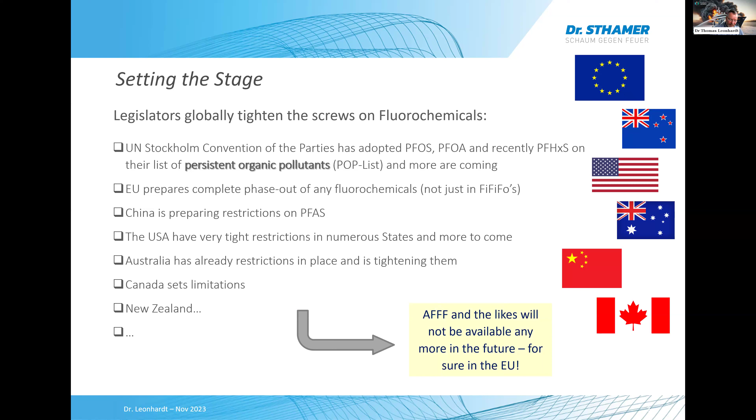Australia already has restrictions in place and is tightening them. Canada, New Zealand, and so on—you see that more and more international legislations are tightening the screws on these chemicals. So it is very likely, if not certain, that AFFF and the like—foams with fluorochemicals in them—will not be available anymore in the future. For sure, they won't be available in the EU.

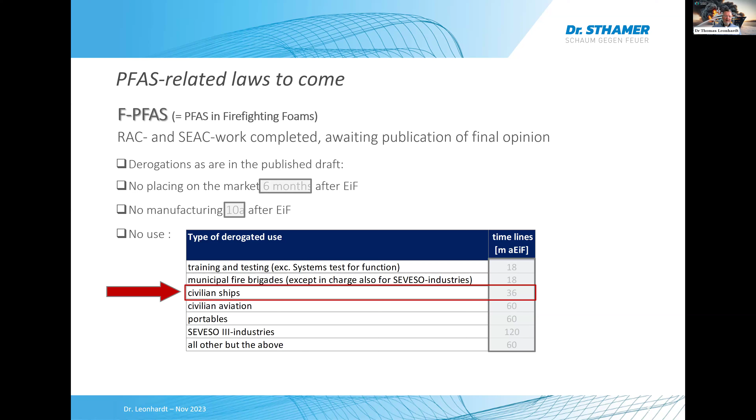Well, what does IMO do about it? In 2022, both SSE and MSC adopted a decision to recommend the banning of PFOS, which is basically following the adoption of PFOS onto the list of persistent organic pollutants of the Treaty of Stockholm. So far, it is just a recommendation to ban PFOS.

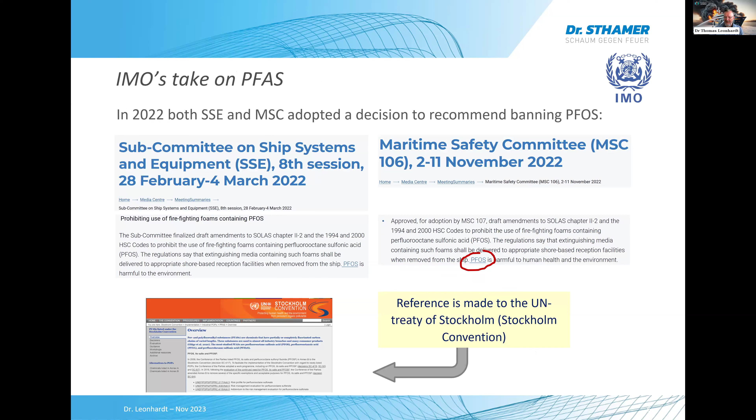However, in recent IMO publications, you find a text passage which says or recommends to prepare for 2026 a foam firefighting ban, which is obviously not quite correct because it's not a ban of firefighting foams. It is only a ban of certain chemicals in firefighting foams. So be cautious about publications and statements like that.

The tanker operator says in SOLAS Chapter II-2 and HSC codes will be amended by a ban of any firefighting foam agent containing PFOS. And again, just as a reminder to my introduction, PFOS has already been banned from the firefighting foam technology starting in 2008. And in 2010, the legal limit was again lowered. So I think PFOS is not an issue today anymore.

If you buy foams in a big chemical legislation such as the US and Europe, etc., you won't find any PFOS containing foams. However, this ban applies to fixed and mobile systems. Existing systems need to remove PFOS and dispose of it ashore. Any of the above must be completed no later than January 1st, 2026, with reference made to the UN Stockholm Convention.

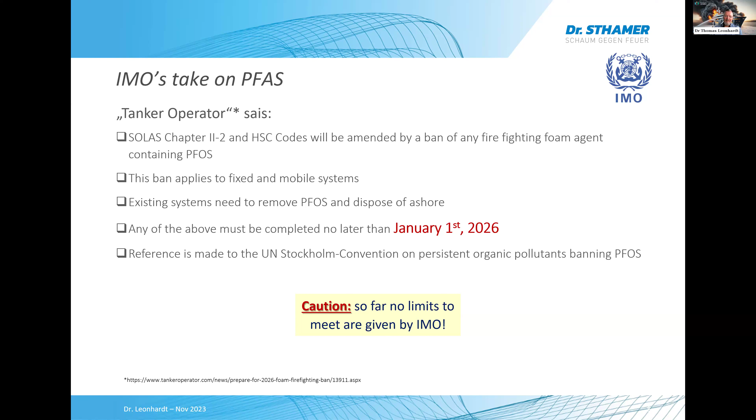Well, how big is the risk actually? As I said, PFOS is already restricted in many legislations since several years, and PFOA is mostly phased out as well since 2020. Consequently, the fluorosurfactant manufacturing industry has almost globally moved away from the so-called C8 technologies. Foam agents sourced in regions with restrictions on C8, and younger than 2020, are not affected by this. High expansion or inside air foam concentrates are also likely not affected because they are fluorine-free foams per se.

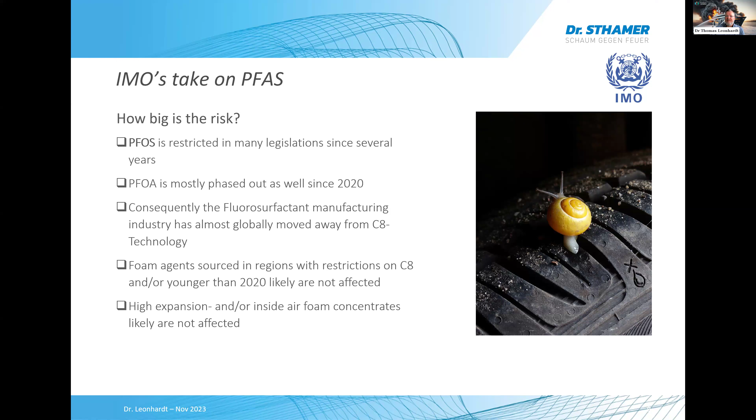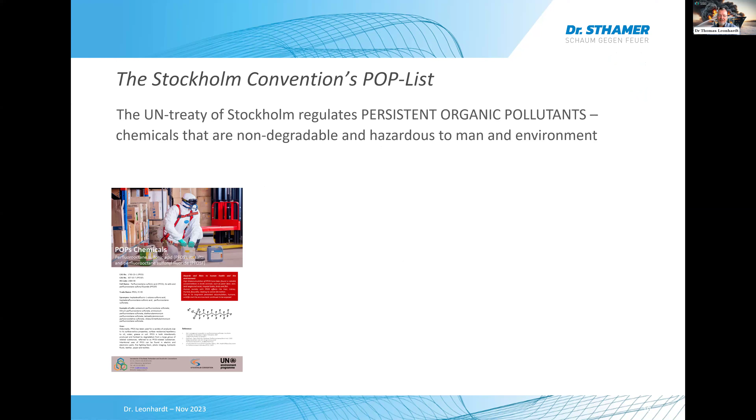We've been talking about the Stockholm Convention, the POP list, a couple of times in the meantime. It's a UN treaty that regulates persistent organic pollutants, chemicals that do not disappear easily in the environment. Once you bring them into the environment, they are just there. For some of them, the degradation time or half-life in the environment is hundreds of thousands of years even.

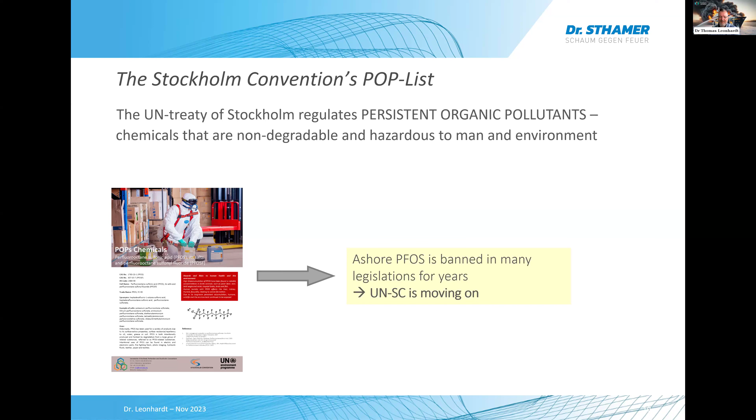PFOS is banned already in many legislations for years, and the UN Stockholm Convention is moving on. One of the first was PFOS, as you see in this publication, and then there's another couple of perfluorochemicals that they have in the pipeline for adoption onto the POP list, which would lead to similar restrictions compared to PFOS. The next one is PFOA, that has already been adopted. PFHxS, which is perfluorohexane sulfonate, has already been adopted. These two chemicals are not present in firefighting foams as a chemical, but only as trace amounts.

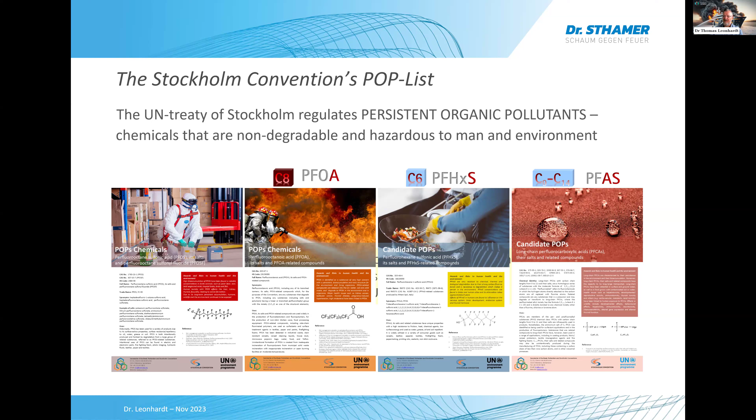And then we have the C9 to C11 PFAS. Also, those are only available in trace amounts. So coming back to IMO's take on PFAS, on the totality of PFAS, the IMO is also looking at extending the ban to other fluorinated substances, not just PFOS. That is already pointing towards the future and what's going to come next. A new section, fire extinguishing media restrictions, will be added to the SOLAS and HSC codes to allow for easier adoption of future prohibitions or limitations.

And what does that imply? First and foremost, the supply of fluorinated foam agents may dry up as the applications for fluorochemicals will fade. Replacing PFOS-contaminated foam agents by other AFFF may turn out to be a regrettable investment. You may see that if you replace C8-based foam now by C6-based foam, the new foam is not going to see its natural lifespan.

It will have to be phased out again in between. System adjustments should consider using fluorine-free foams if you do the change today. So anytime you put the vessels in the dry dock and rework and clean up all the installations, the firefighting installations, to prepare them for new foam, it is well recommended to consider doing that for the use of fluorine-free foams, because that is what is going to come for sure.

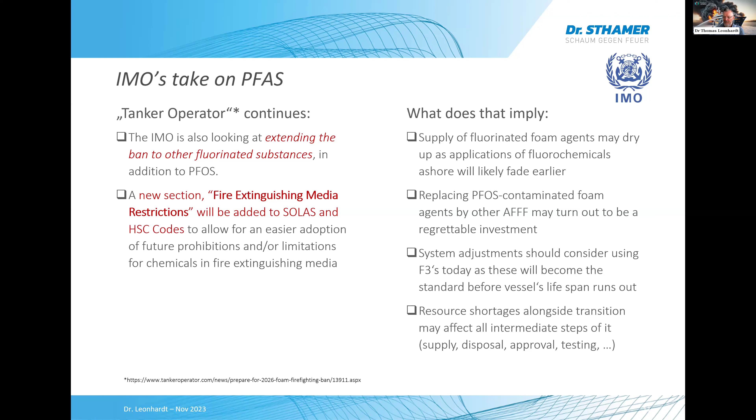This is an extract of the most recent proposal of the ban for PFAS in firefighting foams, and it clearly says 3 years after entry into force for civilian ships, including tankers, ferries, tugboats, and other commercial vessels. It's not talking about privately-owned vessels. However, what we have not seen yet is a clear instruction or understanding of how the European harbors will treat boats that have fluorinated foams on board in the future.

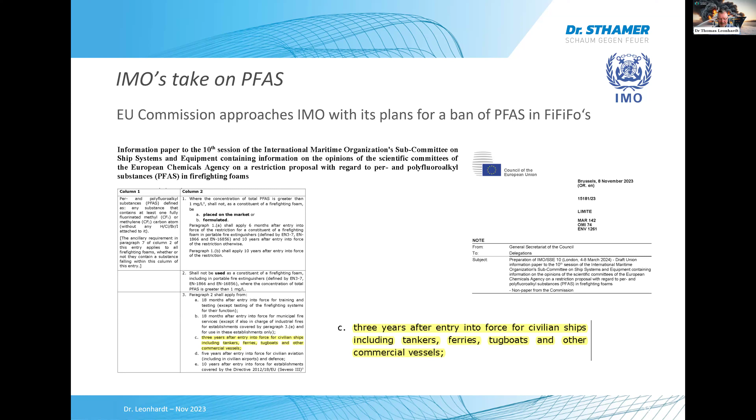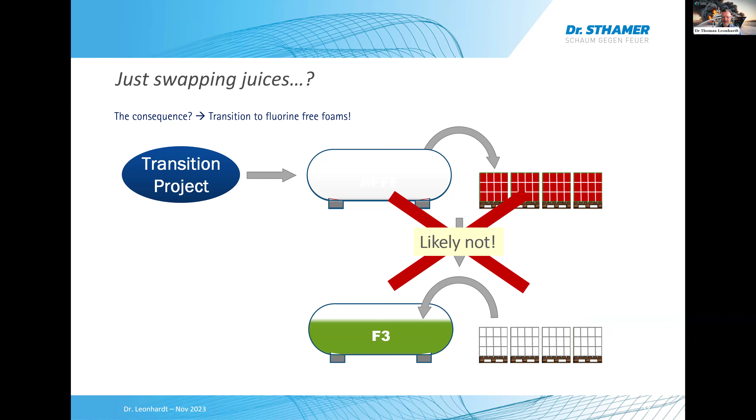Well, when we talk about a transition project, some of you might have been going through this C8 to C6 exchange, and found it to be very easy. You take out the old juice and just wash the containers. You had the old juice in the storage containers and you backfill them with new juice. When we talk about fluorine-free foams, this is very likely not the case, simply because fluorine-free firefighting foam agents are very much different compared to AFFF.

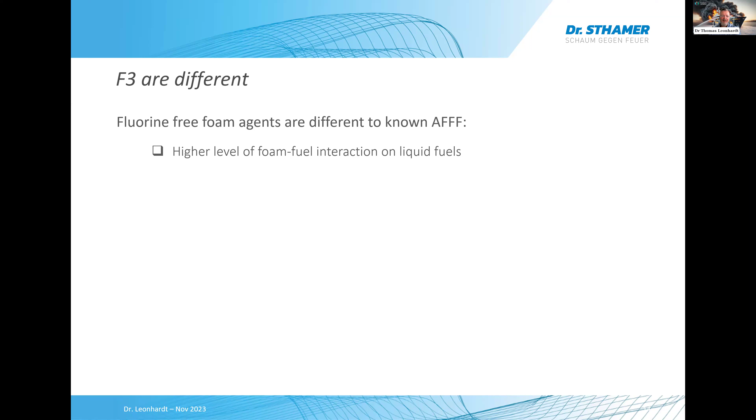They have a higher level of interaction with liquid fuels. We're not concerned about Class A fuels or Class A fires. Any fires of plastics, tires, or other Class A solid materials is not so much a concern. These are fires that fluorine-free foams can evenly well handle, or even better handle, compared to AFFF. But liquid fires is the big thing. We have a much higher level of dependency on a functional foam quality, because we're no longer having the chemical support of the fluorochemicals, but we need a good quality foam blanket to be actually able to physically extinguish the fire.

The effectiveness of a firefighting system is much more dependent on effective foam application compared to AFFF. AFFF is very forgiving, and even foam application that was almost not impacting fire performance, or just slightly impacting it. Now this changes, and the way of application of the foam blanket has a major impact on the effectiveness of the approach.

They are also responsive to water qualities, not just fresh and seawater, but also water qualities in between, things like industrial water, which can contain, to some extent, corrosion inhibitors or biocides, etc. These chemicals do have an impact on the foam quality, and by impacting the foam quality, they of course also impact the fire performance of the foam.

Stability of concentrates is an issue. Viscosity very clearly is an issue. All of the high-performing fluorine-free foams you find on the market today are high-viscosity products. And there's probably even more.

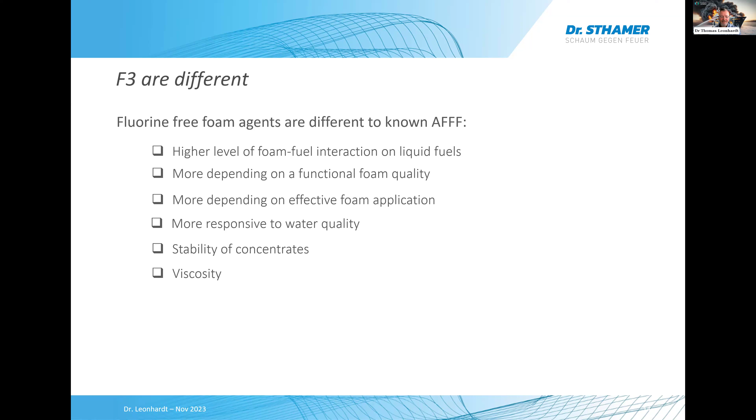So coming back to the transition project, yes, you have to take out the AFFF, but then we get into the details of the minutiae. We have a lot of cleaning efforts to meet the legal requirements. You have to consider selecting a new foam, which needs to be adjusted to what you have in means of hardware, what you have in means of fire risk, fuels, etc. Maybe you have to do some changes to the system. You have to do a relisting of the system, so reapprove the system or get a new operating permit, etc. All of that together consumes quite a lot of time, in particular since many others are doing the same. So time is very much an issue when you're transitioning away from AFFF to fluorine-free foams.

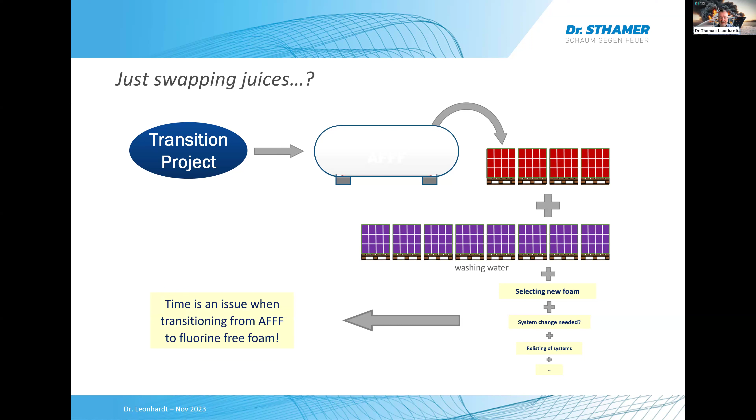We're often asked, is it important to start now? We haven't seen the law yet. We don't know when it's going to enter into force, etc.

But consider the following: transition does require a thorough review of the fire protection concept, and depending on the complexity and the size of the concept, that may have a big impact. It is, of course, a lot of difference if we're talking about a 50-meter yacht or a 300-meter container vessel or a chemical tanker or whatever. So there's quite some differences. However, the more complex this whole thing gets, the more difficult the whole thing becomes also.

Defining and developing the necessary changes to the concept to keep it working, to keep it in shape, means to plan, to test, probably to apply for approvals, to do function tests, etc. So all of that has to be operated in the background and prepared for ahead of time.

Then we're talking about selecting a new foam. As I said earlier, the new fluorine-free foams are more selective, or more affected by the interaction with the fuel. That means you need to very clearly understand your fuels, and you need to select the foam that fits best to all of your fuels. You might even have to consider restricting fuels on certain boats, depending on the firefighting system they have on board.

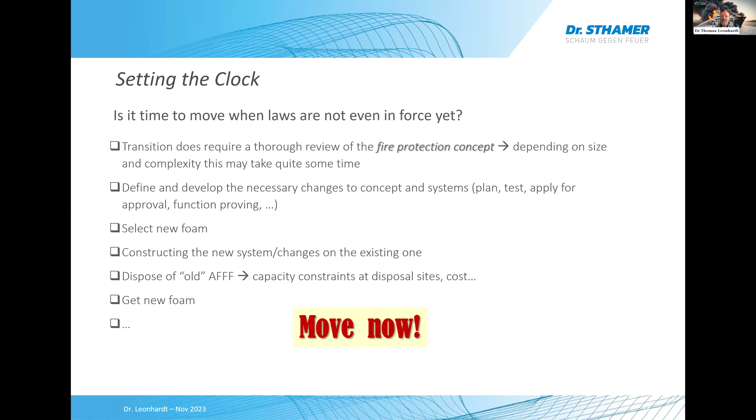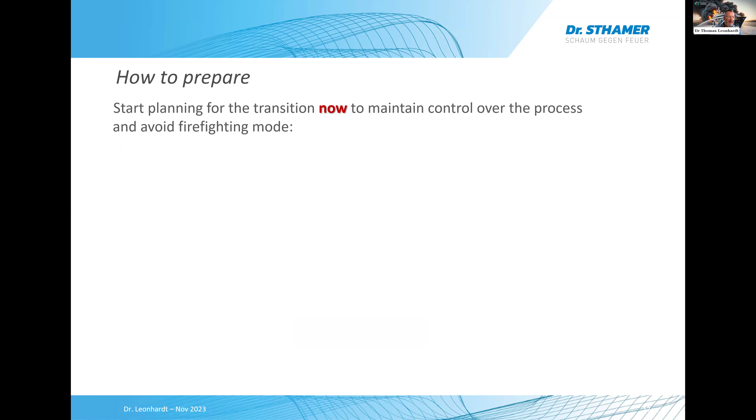Well, how to prepare? It is, of course, recommended to start at least with the planning for the transition right away, and this way maintain control over the process.

The restrictions on fluorochemicals will come. There's no question about it. The only thing that is in question is the extent of restriction, the extent of derogation, and the exact point in time when they enter into force, but they will come.

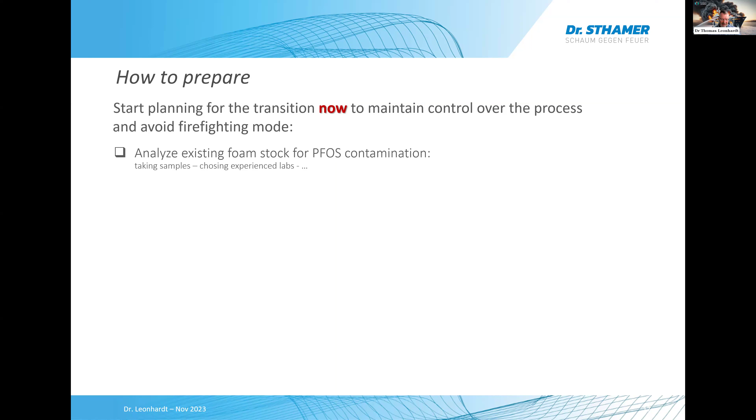So it would be well recommended to start with analyzing your foam stock for the level of PFOS contamination. Maybe if you do not have PFOS-contaminated foam at this point in time, you may not be forced to immediately act to meet the 2026 deadline, but you will certainly have a little bit more time to plan the transition away from fluorine-containing foams.

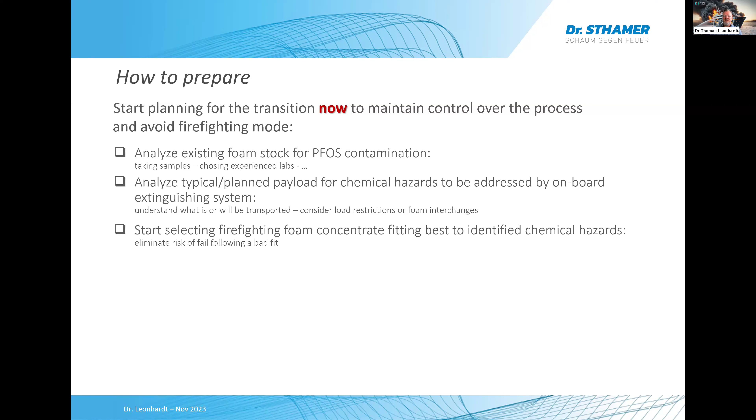It is important to analyze the typical or planned payload for chemical hazards to be addressed on board, because you need to select a fluorine-free firefighting foam that fits best to this type of fuels. Then, of course, you have to select the foam concentrate, and this may include pre-testing depending on what chemicals are transported on board. You may have to run additional tests because as manufacturer we do a lot of testing of our firefighting foams, but there's no way we can test them on the over 60,000 commercial chemicals known in the marketplace.

There might be a need to change, alter, or modify the onboard fire extinguishing system. That typically affects the proportioning system, the piping to the supply stations, etc. And that needs to be looked at, and in the worst case, may require some dry dock time to get this fixed.

Those dry dock stays, of course, need also to be planned to be able to execute the upgrades. And finally, you may need to talk to insurance companies, flags, and authorities to get your boat relisted and reapproved for operation. And then, one little piece often forgotten is training of the crew on using this new type of foam. It's not that you're replacing A by B and everything else stays the same. Using F3 does require some deeper understanding of how foam works to enable the crew to effectively operate the firefighting system and technology installed. So don't underestimate the need for training of crews.

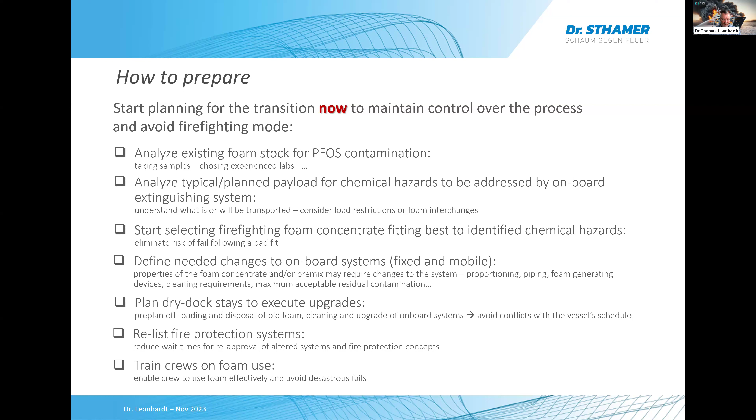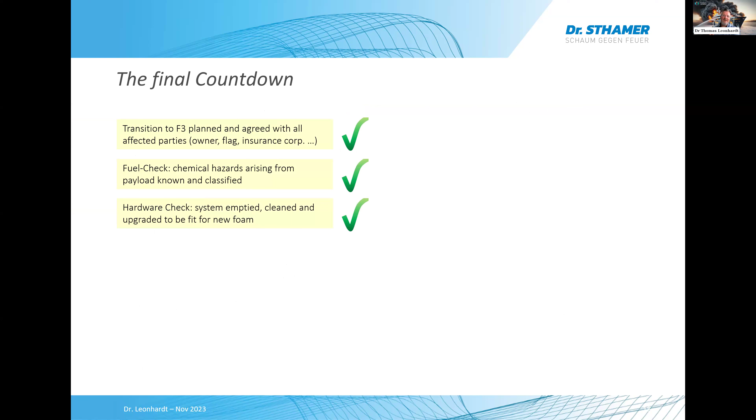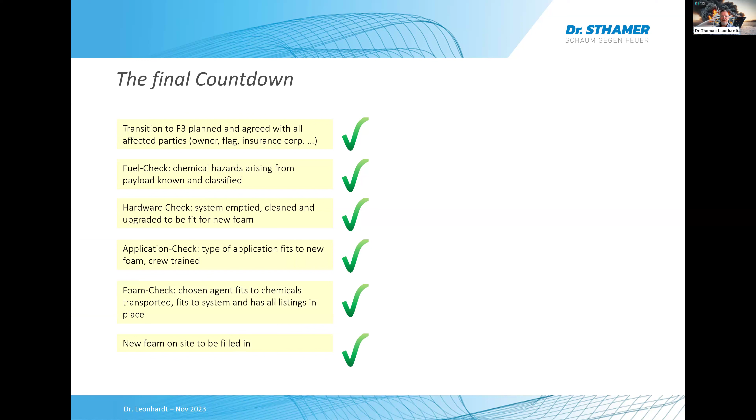As far as the final countdown is concerned, once you've planned all your transition needs and agreed with all affected parties - the owner, the flag, insurance companies, etc. - then you have done your fuel check. You know exactly what chemicals you are dealing with. You have done a hardware check, so you know the hardware on board is capable of producing functioning, effective foam from the agent you selected. You have done an application check - how do I best apply the foam, what applicators do I use, etc. And you have trained your crew to effectively use it. You have selected a foam agent that fits best to your needs, and you have the new foam on site to be filled in. With all of that, you are ready to take off.

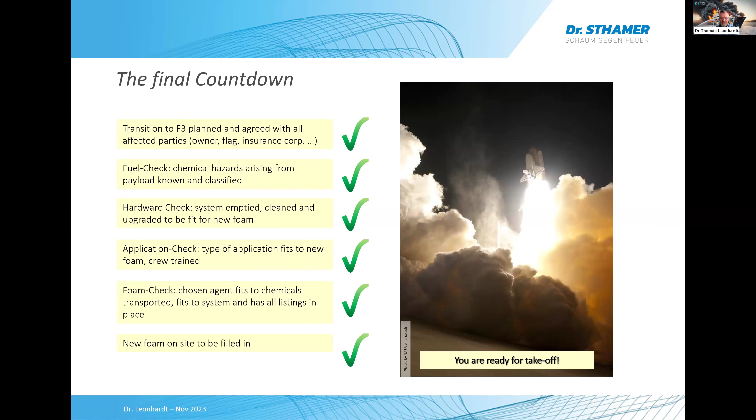And with that, you made it.

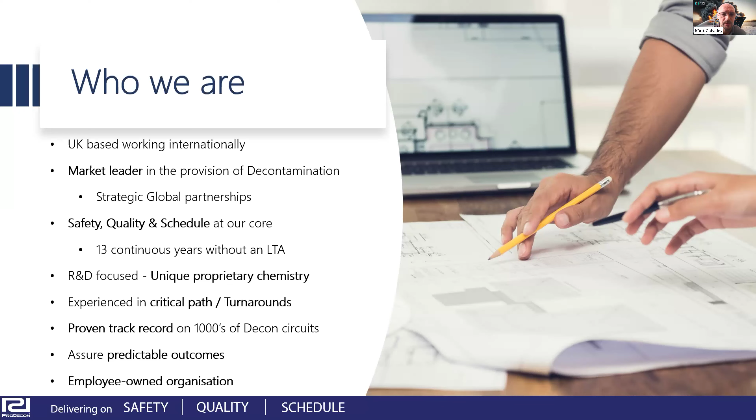So we operate globally. We're based in the UK and Europe, but we have a number of partners that allow us to operate much further afield, over in South America, the Middle East, and more recently Southeast Asia, where we've recently signed a partnership. Our equipment is designed to travel, and we take the solution to the customer.

All of our equipment is contained in 20 or 40 foot containers. So when we're moving overseas, that equipment is shipped to the customer, and the solution is delivered where the customer is based.

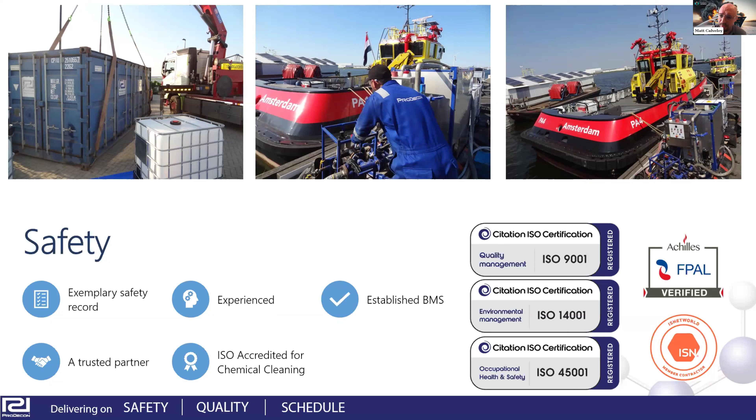Obviously, with the industry we work in, safety is really important, as is quality and environment. We've got an exemplary safety record. We're very much left to our own devices on our customers' sites now - we don't need to be managed, they trust us to operate on their sites. We've got all of the established business management systems and procedures developed for PFAS decontamination, and we're also ISO accredited for chemical cleaning, which is quite unique, especially in the PFAS decontamination industry - accredited by 9001, 14001, and 45001.

So if we move on more to the subject of PFAS decontamination. I mentioned our partners, Tetra Tech - just shy of 3 years ago, we entered an exclusive arrangement with them. Tetra Tech developed the chemistry, the PFAS scrub chemical agent that we utilize to remove PFAS from the tank or system walls. That chemistry was developed at the US Department of Defense. Tetra Tech wanted to look for a partner who had experience in decontamination.

No system is the same, so they were looking for someone who was an expert in decontamination, who could partner with experts in PFAS. Together we developed the relationship. The way the partnership works is Tetra Tech supply the chemistry, and ProDecon manage the customer and all of the in-field decontamination.

Once we've done the analytics to verify the success of the decontamination, those samples and swabs are sent to Tetra Tech, who then issue them to an accredited lab where the PFAS, PFOA or even PFOS is analysed to understand the success of the decon. Once we get the data from the laboratories, which I will talk about in more detail shortly, Tetra Tech then develop an independent report, which is passed on to the customer to inform them of the success of decontamination.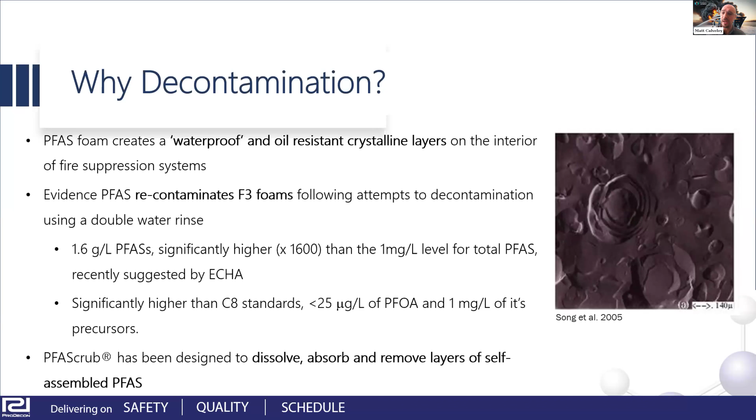Suggested by ECHA. What came to happen of that is that's where they really started to understand, well, hey, this was a fluorine-free foam, where's the PFAS come from? And that's where they started to understand how PFAS started to layer on these systems, and that there needed to be an effective means to remove that PFAS to prevent it from rebounding into your normal foams. This is where the PFAS scrub chemical comes into play. It's designed to dissolve and absorb and remove layers of self-assembled PFAS.

So when we're talking about decontamination, experience does really count. We've got a huge amount of experience, not just in the PFAS world, but in dealing with process equipment across some of our customers' sites, predominantly in the oil and gas and petrochemical industry.

Now, every fire system is unique, and we've done systems from 100 litres up to fire engines, up to 42,000 litre tanks. We are looking at even bigger than that at the moment, but without doubt, there are always in-field challenges. Something's been missed, each system is different, and you need to overcome that. And that's really where the experience comes in.

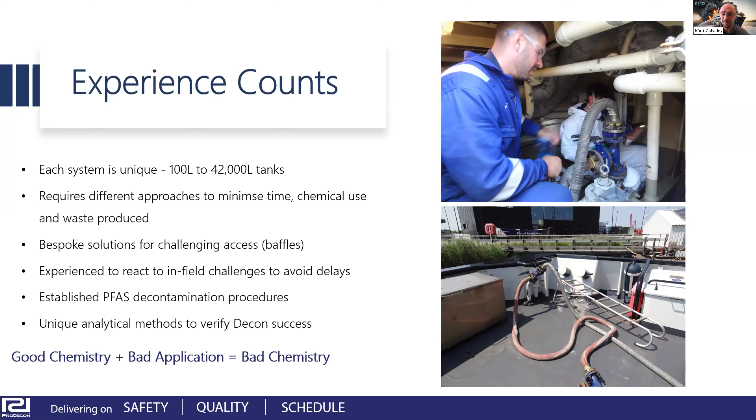So I'll talk on the next couple of slides. I'll talk about the decontamination process and how that works. But what's important is to understand how we verify the success of decontamination. And we have a number of methods to be able to do that.

One of the more unique methods for us is the tank surface testing. A lot of companies test the rinse water at the end of decontamination and check PFAS levels there, but that doesn't really tell you the success of the decontamination. What you really want to understand is the PFAS levels left on the tank wall, because that's where the main risk resides - that's where PFAS will rebound into your new fluorine-free foam and potentially make it breach future legislation.

Not only that, there'll be regret spend, because you'll have to replace that foam and then do an effective decontamination again. Effectively, what our surface testing does is swab the tank wall pre-decon and post-decon, across a significant 100 centimetre squared area, on opposite sides of the tank. That allows us to determine the levels of PFAS on the tank wall pre and post, giving us the data to determine the success of the decontamination.

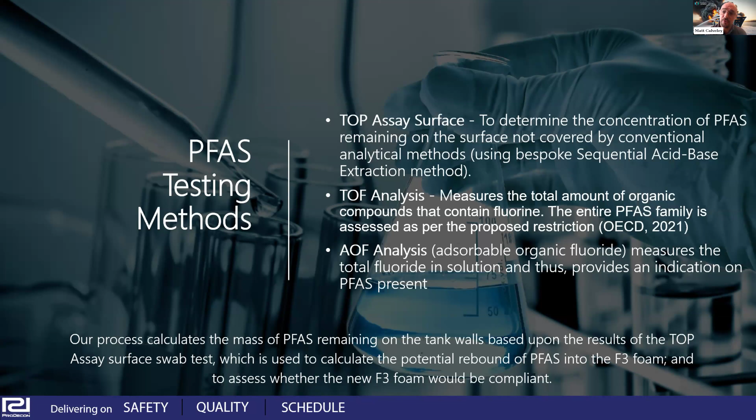But at the moment, we're typically doing TOP surface analysis, and AOF analysis. And out of all the systems we've done to date - over 150 systems - we've had 100% compliance in terms of success.

So we'll talk a little bit about the decon process and how that is completed. We can offer a turnkey solution from foam out to foam in. We very much work with what the customer would like, and with partners like Dr. Sthamer, who may manage the foam out and foam in. It's all about what's best for the project and the project schedule.

Typically, once we've got hold of an asset, we've done all the pre-engineering work, and the method statements and RAMs have been signed off by the customer, we drain and pump out the old foam. We remove and store that - it's all contained in a closed system, in a bonded area, so there's no risk of any leach of foam containing PFAS. That's stored away in IBCs and set aside for disposal with the decontamination waste.

We then move to a water rinse. What the water rinse does is we add the anti-foam, and as we circulate the water with anti-foam - either by liquid fill or spray head methodology, spray being preferred - we remove any foam residue from the systems, from the tanks and the pipe works, typically up to the proportioning system.

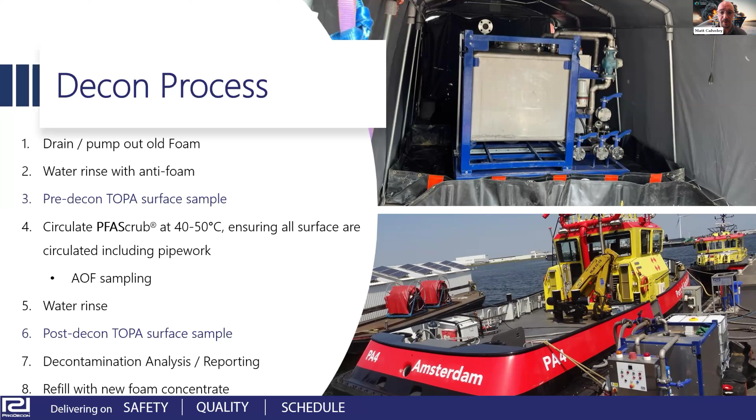Where we can, we use a 3D spray head, and the reason we do that is the main risk - the chemistry, the PFAS - is on the tank wall. That's the area we need to decontaminate, and effectively this spray head sprays 360 degrees in each angle.

We don't want to be filling the system because we're using more chemistry and producing more waste. We're looking for the best cost-effective solution for you. So we would typically spray the chemistry, and that would recirculate back into the skid, going around in a circulation.

We make sure that we have enough chemical reagent at the bottom to ensure that the lines are fully liquid filled, because obviously if you're using a spray head, you're not going to be able to spray head the lines, and we need to ensure that the lines are fully decontaminated as well.

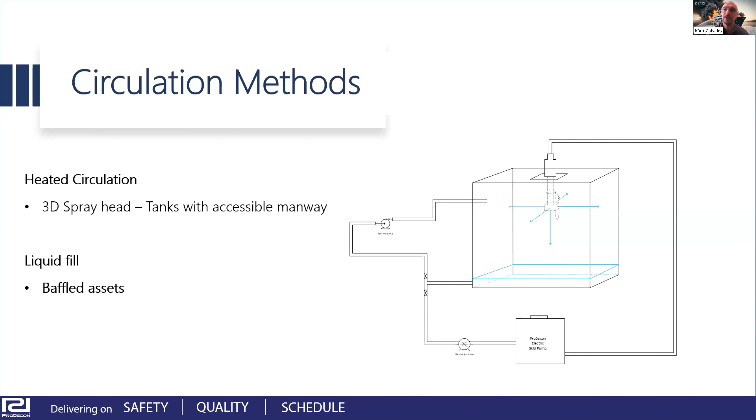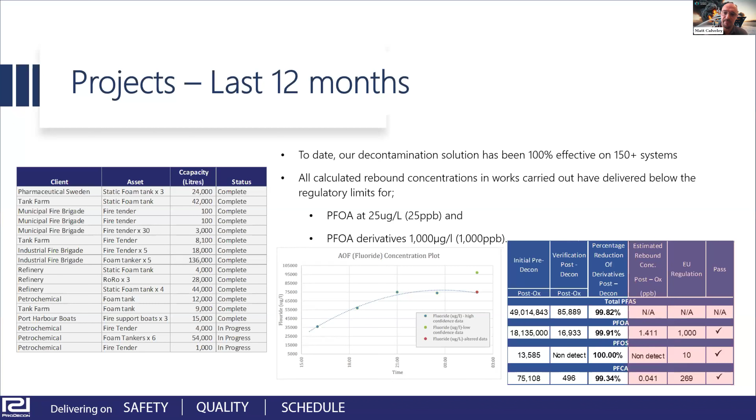To summarize, we are experts in decon, partnered with global experts in PFAS. We've got over 50 years collective experience in decontamination. Our procedures are established for all types of systems now, because we've done boats, tanks, vehicles, jetty pipelines. We've got every type of system you could think of that we've decontaminated for PFAS. We're ISO certified 9001 and 45001 to carry out decontamination of these services, and we're an operationally ready and environmentally focused organization.

We're continually looking at how we can do this most cost effectively for our customers. We're in this business to work with our customers to find the right solution. We fully appreciate that a lot of customers haven't anticipated this expense to carry out decontamination, so we work with yourselves to find the most cost effective solution. Thank you.

Oh, Richard, you're on mute.

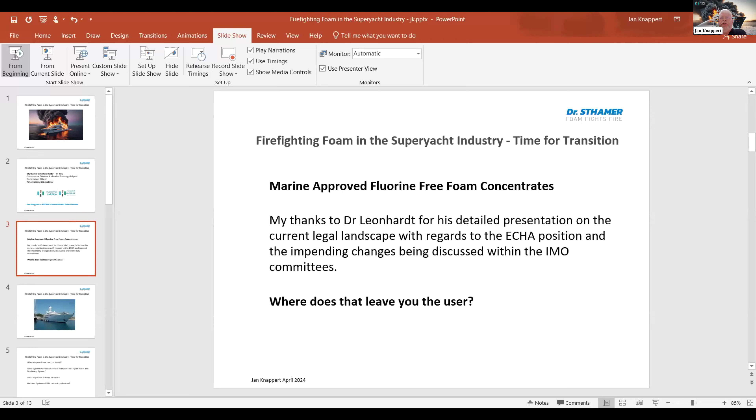After Thomas's presentation, where does that leave you, the end user?

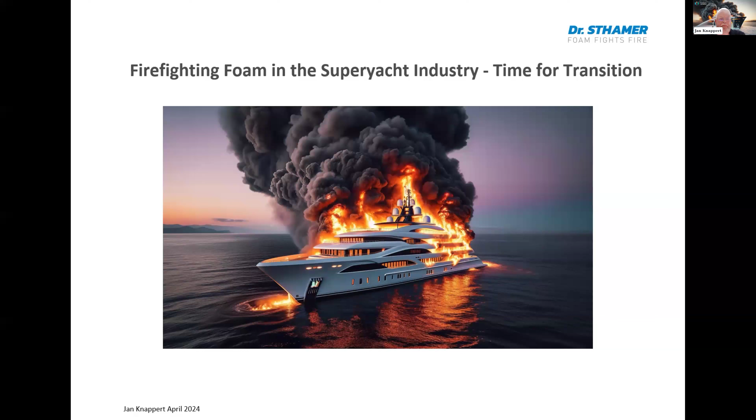Sorry, Jan, is your screen supposed to be showing your slides? It's reduced at the minute. I don't know why that is. Is that better? Hang on a minute, let me adjust. I'm not used to Zoom. Neither am I. Is that better? Just bear with me, let me see if I can make some adjustments here. Yeah, right, it's there, but I'm not sure what. There we go. Let's try that, can everybody see that? Yeah, I should think so. Okay, sorry Jan, go ahead. Okay, no that's fine, thank you. So

Where does that leave you? Where was your foam used on board? Are the fixed foam systems fed from a central tank to the engine room and machinery spaces? Are there local applicator foam stations on deck? Is the heli-deck system DIFFS, so deck integrated firefighting foam systems, or local applicator stations?

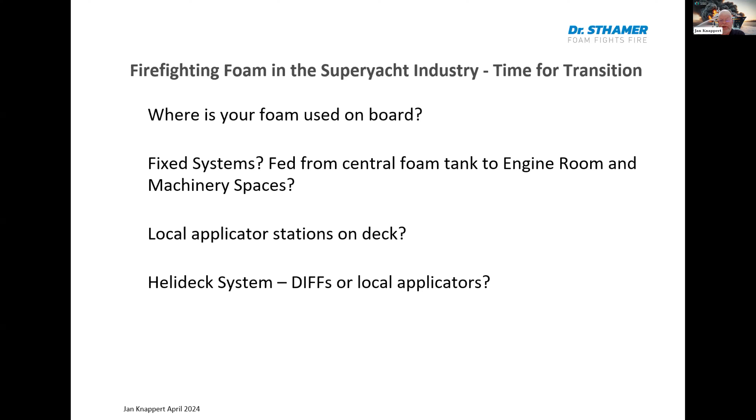So we start with the fixed systems fed from central tank to engine room and machinery spaces, typically low expansion foam for engine room and bilges under the deck gratings. We have a new STHAMEX MARINE 3%. It's freeze protected to -20, and it's a direct replacement for AFFF 3%. It is a low viscosity product, so minimal pipework changes need to be done after you've decontaminated your foam tanks. It's approved to IMO 1312 for low expansion deck foam systems, IMO 670 inside air foam systems, and it's also tested to ICAO-B with seawater for helideck operations. It also carries MED Module B and D listings, so it is perfect for marine use.

We also have high expansion inside air foam systems, which have been tested to IMO 670, but also has ICAO-B certification.

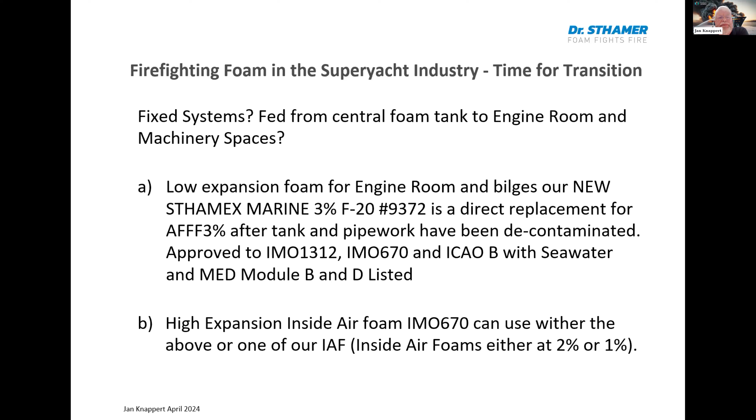So local applicator stations, which are available in 20 litre cans with tamper evident seals. We have the STHAMEX MARINE 3% freeze protected to -20. Then we have a 6% version, freeze protected to -15, and we have a 2% version as well. Now, IMO 1432 paragraph 7.11 states that for local applicator cans, 20 or 25 litre, which still have the original factory seal, you will have a 10-year life on the cans. And then you have to dispose of them in an environmentally responsible manner.

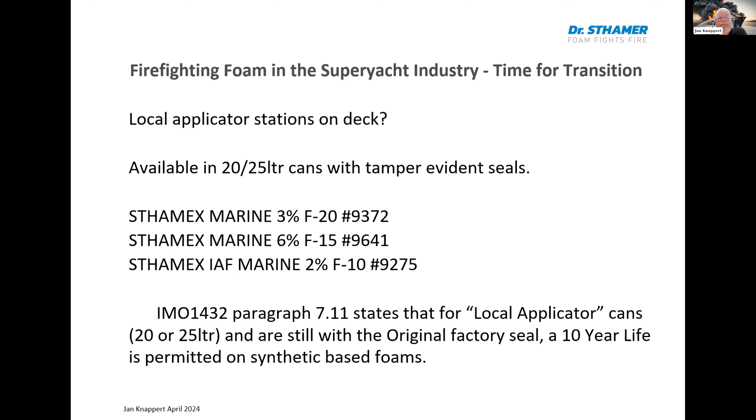Now, for helideck systems, you either have DIFFS if it's a big mega yacht, so deck integrated firefighting system, which can be used typically at 3%, or we have a 1% foam available for that. So as I said earlier, our STHAMEX MARINE 3% is a direct replacement for AFFF because of its low viscosity, and also our STHAMEX IAF MARINE 1% can also be used on ICAO-B helidecks. You can also use the local applicator stations for local intervention with the above foams, as long as you've had the necessary training, or your fire crews have had the necessary training.

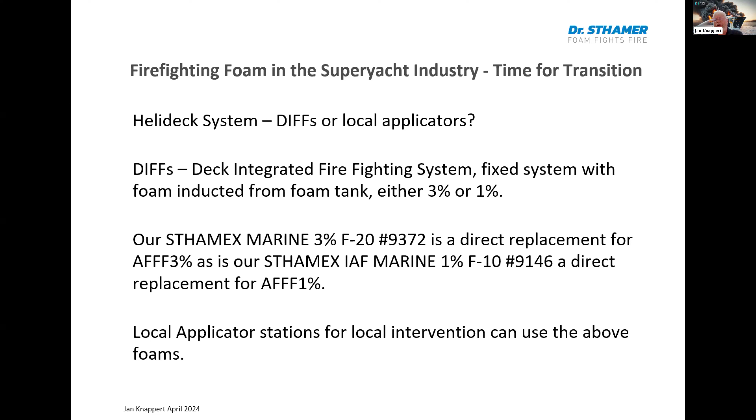So, in general, the foam concentrates we produce have a 5-year warranty, subject to correct storage to our instructions.

Excuse me, what's happened there?

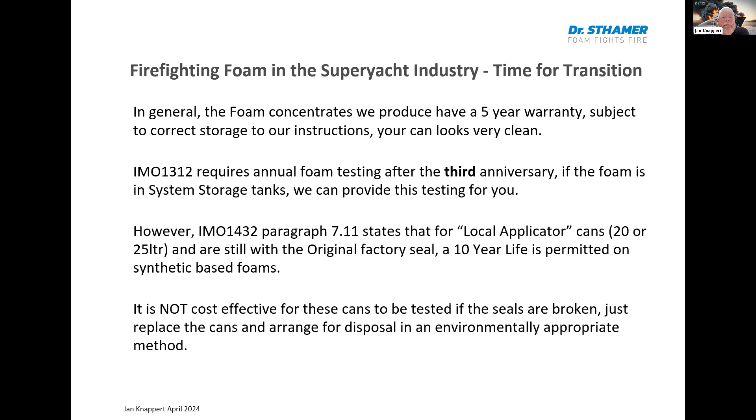So IMO 1312 requires annual foam testing after the 3rd anniversary of the foam if the foam is in system storage tanks. We can provide this testing for you through Maritime Aviation. As I mentioned earlier, IMO 1432 requires that for your local applicator cans, they have a 10-year life. It's not normally cost effective to test the cans because once you've broken the seals, you have to replace them. So we recommend annual foam testing to ensure efficacy when it's in system storage tanks after the 3rd anniversary. And we check the expansion ratio, the sedimentation, the pH, the specific gravity, the 25% drain time, and alcohol stability if it's an alcohol resistant foam.

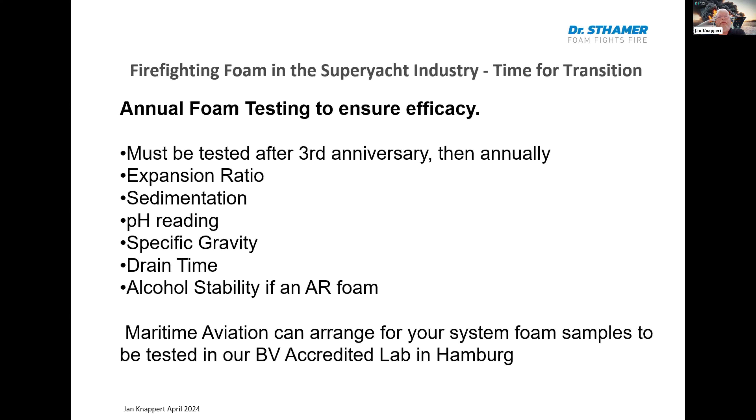And as I said, Maritime Aviation can arrange all of this for you, to our BV accredited lab in Hamburg. So all our foams and services are available through Maritime Aviation.

Now, I'd like to make a couple of comments on Thomas's presentation. With the impending IMO and ECHA legislation, where there's a 36 month window for civilian shipping, that is of course for European flagged vessels at this time. It is not for all internationally flagged vessels. So it is for European flagged vessels that this restriction will come into place first. Other vessels, we will wait and see what the European Union and IMO decide.

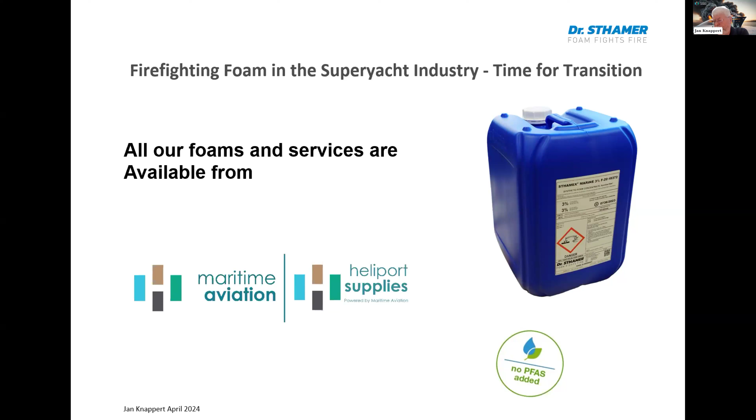So, thank you. Any questions?